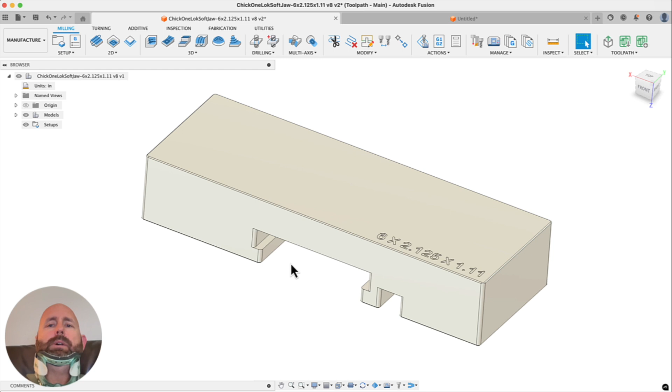Here's the part. So it's got kind of a tight undercut. We're going to use a Harvey Keyseat cutter to get in there. Other than that, it's a real simple part, but this poses some problems. I broke a tool just trying to kind of plow in there - to be honest, I just made a mistake and forgot. These tools are expensive and don't like to just go plowing into corners.

So I did a 2D adaptive, that's the right way to do that. I'll show you, the problem is Fusion has kind of a known issue they've been struggling with for years: when you're using a Keyseat cutter with an adaptive toolpath, often it'll retract while it's still under the cut. So I'll show you how I deal with that. If nothing else, the video hopefully will be worth it for how to handle that.

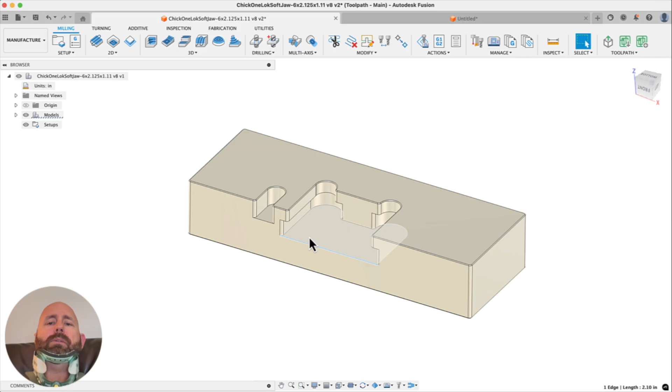And then I'm also going to show you how to under chamfer this. I do have a 90-degree side chamfer mill, but we're just going to use one of my thread mills for this. I'll show you how I do that. And I think that's really the geeky part of this, but then you'll get to see the kind of walkthrough of Toolpath. So with that, let's get started.

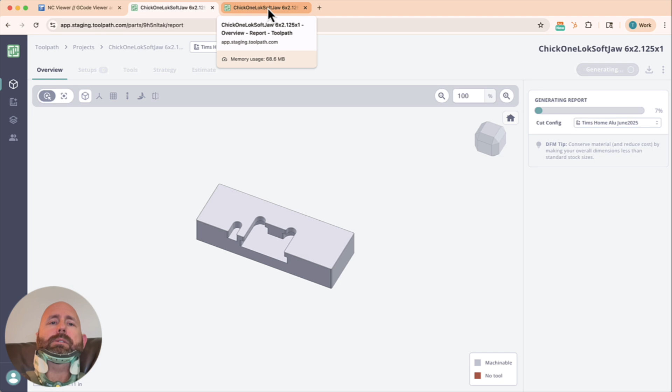So first thing we can do is we have the Toolpath plugin. We could just hit send and send that sucker straight to Toolpath. Now what this does is it's going to define your setups, right? So based on your preferences, your cut config and your stock preferences and stuff, it'll define your setups. I sent one a few minutes ago, so if we go take a look at that, there's one already being worked on here. Actually, I'm too impatient - I think that is the same as this one, maybe not. So anyways, this is going to define the stock based on what's in my preferences.

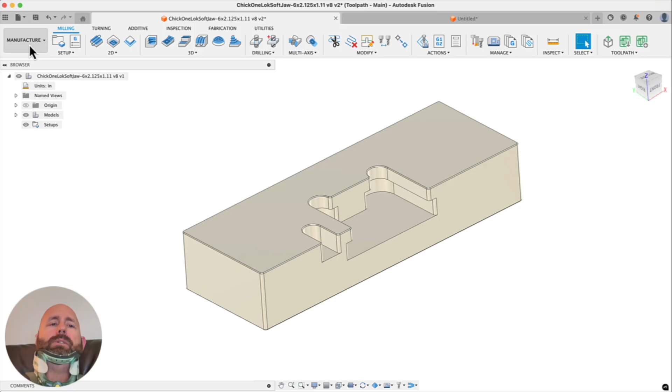In this specific case, I already have the stock I know I want to use, and I kind of want to micromanage it a little bit - tell it exactly where the work coordinate is, exactly what the stock is. So let's just go to the Manufacture tab, go to the setups, and the first thing I'm going to do is dock that over there. I like to set up my work coordinate. If you guys didn't know about this, if you click the little white dot, you can just kind of move your work coordinate system around. You can also click the head of your arrows to flip them, or you can click them and reorient them to different surfaces or line segments or whatnot.

Anyways, we'll move that sucker down there. We're going to make this the stock box point. So this is - I like my work coordinate system to be down there, against the parallel surface, against the Y fixed side of the jaw, and against my stop. So on the stock, I know exactly what size the stock is, so I'm just going to go define the stock size: 6.25 by 2.25, almost forgot it there, and then by 1.25. And then I don't want to do any rounding because I know exactly what the stock size is, but then I do want to - there's a couple ways. I can either offset it in the negative or offset it in the positive.

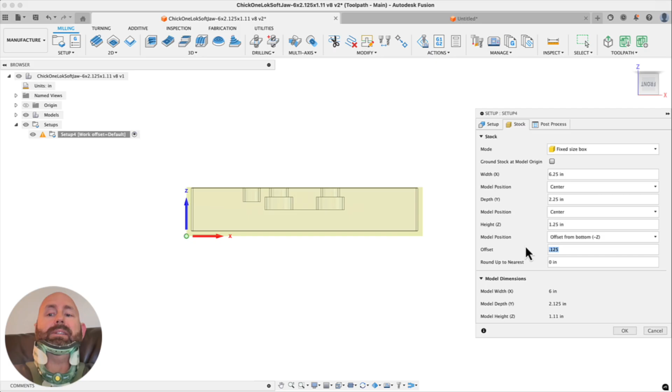One perspective would be I only want to knock off 10 thousandths of an inch for a finish pass on top. The other is maybe I want to offset it negative because I'm holding onto it with these Mitee-Bite Talon grippers, and I know I need at least 125 thou to hold. Actually, I only need about 90 thou to hold onto, but I usually do about 125. So I just remember 125 minus the 90 I need leaves me 35 thou. As long as I don't go below the part by 35 thou, I'll be good.

So on the post processor setup, we're going to do 10001. We'll call this first op.

On the work coordinate system, for any new Fusion users, 0 and 1 is equal to G54, 2 is 55, 3 is 56. I'm going to use 54 and 55 on this. I never use 0, because if 0 and 1 equal 54, I leave 0 for when I haven't made a decision on what work coordinate I want to use. So if you ever open one of my files and it says 1, 2, 3, 4, or whatever, I made that decision. The only time I'd leave it at 0 is when I open a program and see 0.

It's like, okay, maybe I want to run out to the machine and make sure I'm not using something. In this case, I'll set that at 1, so my output will be G54.

I always like to come back and make sure my model's not selected, right? Make sure my model's selected and we're good. Just a troubleshooting tip - if you ever have weird stuff, especially with 3D toolpaths, the first thing you should do is go to the setup and make sure you have the proper body selected.

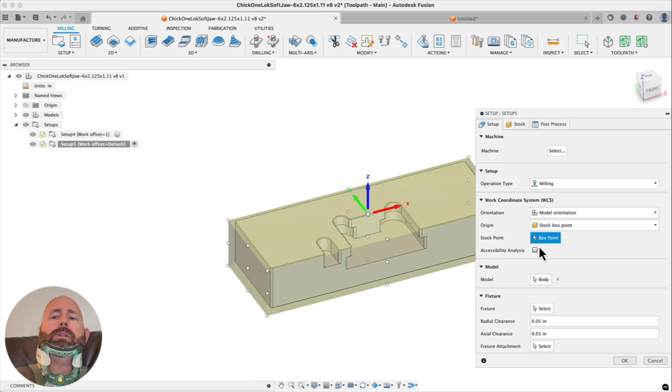Okay, and then the second setup's easy, we just do another one. We're going to do a model box point on this one. I want it to be this orientation, so I'll flip the Z, flip the X, and put this guy right down there on the model box point. Again, this will be against my stop on the X. This will be my stop and my hard jaw in the Y, and then I'll have it sit on the parallel surfaces or surface.

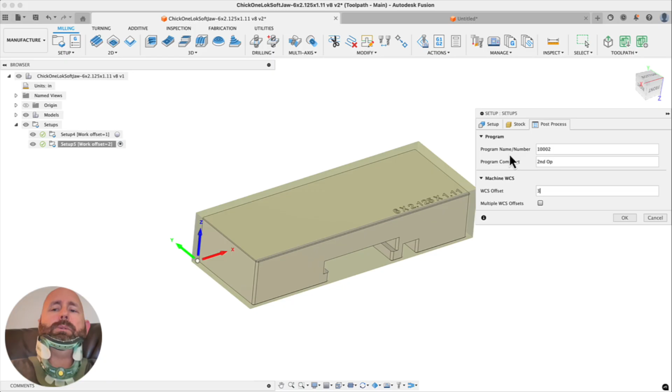Stock, we're going to do from preceding setup with continue rest machining. Here we're going to do 10002, we'll call this second op. Then I'm going to output this - we did 54 on the first one, so we'll do 55 on the second one. We'll hit OK, so my setup's ready.

If I didn't talk through that, it would have been a lot quicker. But the nice thing is now I've basically micromanaged it. I already have the stock, so I have to use this stock. Toolpaths should probably come up with something pretty similar because I have my preferences set up like that, but this will be exactly what I want. Then when I get it back from Toolpath, I don't have to worry about resetting any of that stuff.

Let's just save this thing real quick - I'll say stock ready for Toolpath. Okay, and then we'll send this over to Toolpath. Here you'll see the difference from that last one I showed - it's asking me, hey, do you want to send it over with these two setups? I'm going to say yes.

So now it's coming over. My guess is it's probably going to take about 2 minutes, so as it loads up I'll talk through what's happening, and maybe we'll run over and take a look at the first one I sent over without the attached setups.

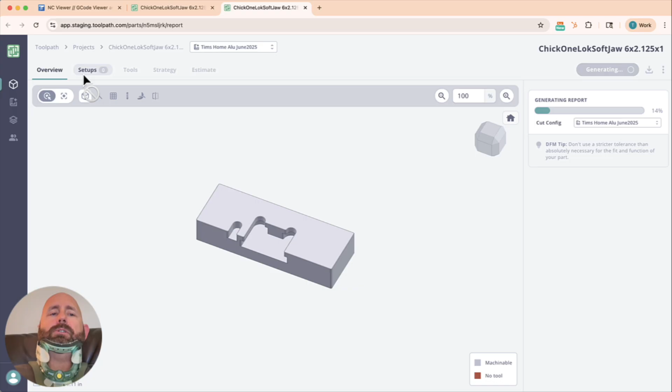So this is popping over, everything looks good so far. It'll take a minute or so to look at the setups. Let's go back over here - you can see the overview, setups, tools, strategy, and estimate tabs are all ready to look at. It even says copy and ready to send back to Fusion.

So we can take a look at the stock, right? I said it's probably going to be pretty close to what I wanted. You can see the stock size is 6 inches and basically a 1/16, and the Y and Z are exactly what I would have already set up.

It's probably offset a little less on this side than what I set up before. The X is a little shorter, but I know the material I had, which is why I went through the extra step to define the stock. So let's take a look at the part real quick.

You can see we have a 99% machinability score, meaning 99% of the surface area is machinable, and these numbers here show what's not machinable with my cut config. That's real tools in my shop, set up the way I want. We can go over that in another video, but I have a library and a cut config with different tools set up. The cool thing is I have recommendation tool catalogs that say, hey, if I don't have the tool, go take a look at this.

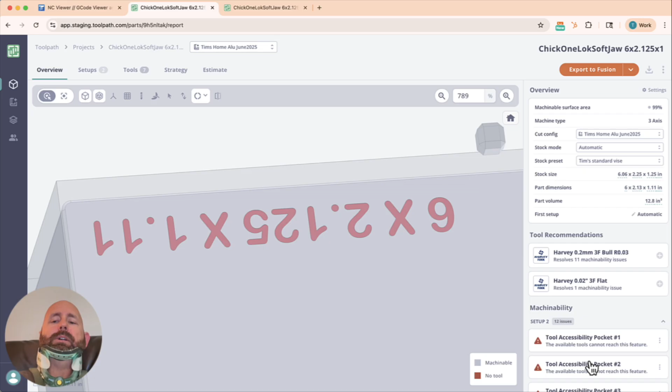So with that, I have a couple tools recommended. If I click here, you can see, if I flip over and zoom back in, all the tool accessibilities are these tiny little pockets for my engraving. I do like to engrave this, but I don't want to actually make pockets. I'll show you how I do that in Fusion.

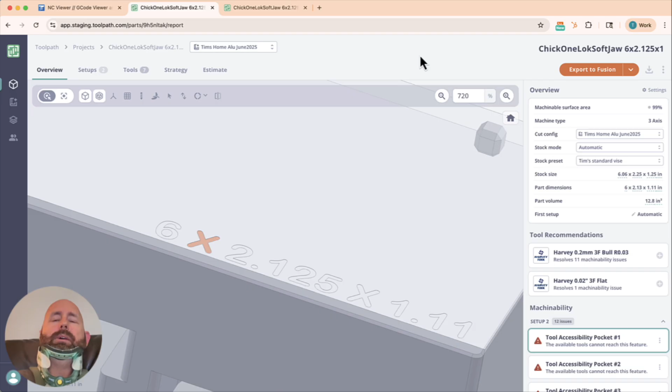Hopefully I remember. But if I wanted to machine those, I would just hit plus and plus and regenerate that, and that would give me these machined pockets and tell me basically what tools I have to go buy. So the setup's pretty basic. It picked the same first setup that I picked, and the same second setup that I picked.

Cool little pro tip I learned recently: if you're on one of these setups, instead of going down through here, I just want to know what's machined on that first setup. If you hit setup 1, all of that is machined in the first setup, and that's not the same thing. If you click on the setup here, that's what's getting machined on the second setup.

So that's nice, and you can see here's all the pockets that aren't getting machined because we didn't add those Harvey tools. So in the tools, here's my tool list. Tool 1 is my favorite face mill. Tool 2 is kind of my go-to rougher finisher. There's my keyseat cutter, tool 7. Tool 36 is my 1/4 inch 3 flute.

It's got a 60 thou tip, corner radius. I have another flat end mill. This guy's my favorite rougher, and we've got a couple different tools here.

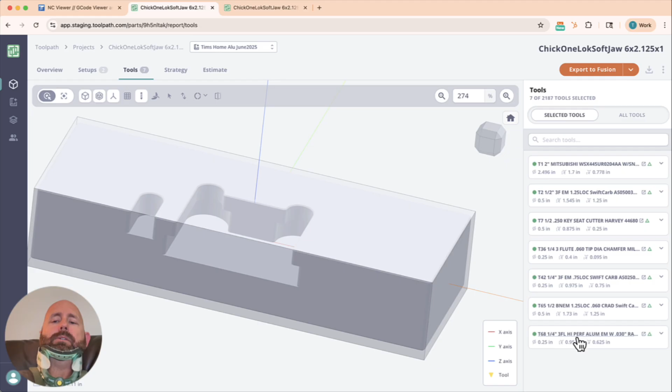So strategy—this is where if you want to see, hey, what is this super swift carbide rougher doing? Well, that's what it's going to do. And then here's what your finisher is going to do, and so on.

The only difference here is that this is with my exact setup. You can see how we have a little bit extra material on the sides, a little more offset on the bottom. Same tool recommended, right? So let's hit copy the part key, and then we'll go back over to Fusion and hit OK.

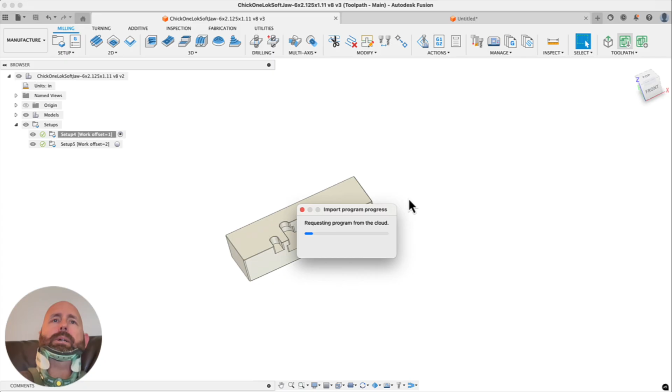Now we have a decision to make: do I want to import into a new document, or do I want to import it into the current document? I'm going to just dump it into here—I already made the setups, just add the toolpaths to that. So we'll do import into current document, and that'll take a second to come in and add the toolpaths to my setups and then start calculating.

We're getting better and better on the toolpath automation. I'm pretty happy with it. I don't think I do any parts now that I don't put through Toolpath first as an accelerator to get me started with all my roughing toolpaths and finishing toolpaths and all that kind of stuff.

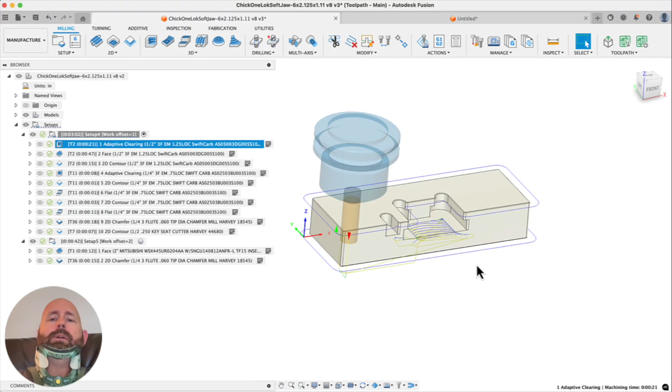So if I expand these, you can see we have a nice roughing toolpath here. I'll do a face with that tool. We'll talk about making these changes in a second, but so far everything looks pretty good to me. I see some things I want to change.

Our goal, there will be a day when we're knocking this stuff out of the park and you'll just do a quick simulation and run it. But our goal is just to be a big accelerator for now.

On this side, what I see is that it basically did the face and did the chamfer. We're gonna add engraving there. On the first side, the main thing I saw, there's some micromanaging I'll do along the way. For now, Toolpath is only doing essentially 2D contours for keyseat cutters and slot mills, slitting saw type tools. It does a really good job of breaking it up to make sure you're doing the right depth. Some people kind of struggle with that.

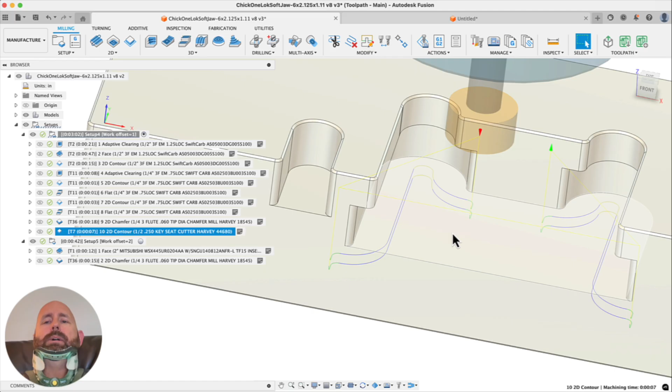I know that tool won't handle just plowing in there and plowing out. So we're going to add a 2D adaptive so we don't overload the tool into those corners. Then we're going to add an under chamfer here, chamfer here, and chamfer there with a thread mill, so it won't be a 45-degree chamfer, it'll be a 60-degree chamfer, but I'll show you how I do that. Maybe I'll even show you how to store it as a template so it's really easy to use later. So with that, let's get started.

There's really nothing wrong with starting off with this 3D adaptive. There's nothing really wrong with that, but to be honest, I want to do the facing ahead. Sometimes it's easier to drag down. I want to just start off by facing with my favorite face mill.

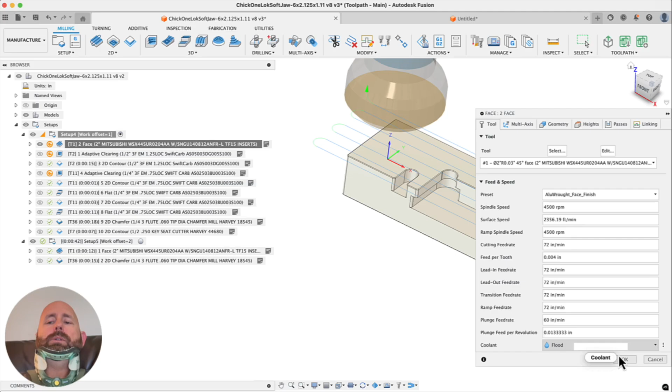I'm just going to change this to this face mill with my finish feed rates. I'll hit OK, that's a quick change. Let's just regenerate this. Now this is using tool 1, which is a face mill, so that's nice, it doesn't go very far below the part. If it did, I would change it because I already told you I can't go below that. We're holding on to 125 thou, so I can't, and I need 90 to really hold on to. So I can't go past the bottom by more than 35.

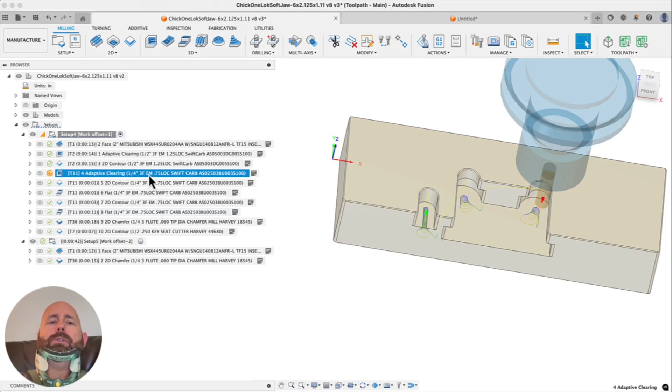Here's the finish. So we have tool 2 rough and finish, which is great. Tool 11 does that, which seems fine. We'll regenerate that. Tool 11 comes in here to do a wall finish, and then it does a floor finish. Knowing that the tool's wide enough to do both and just the wall finish, I'm going to delete the flat machining. The Toolpath will make that better here in the not too distant future. But for now, we do a flat and a wall and pretty much everything.

On the bottom height, we gave it 1/10, basically stepped it up 1/10 so we don't drag on the bottom. And then I just want to make sure we didn't do the same thing on stock to leave, so I'll turn that off. So what I did is I changed the bottom height to reflect this bottom, and then I got rid of the stock to leave there too. So deleting the flat was just saving a little bit of time.

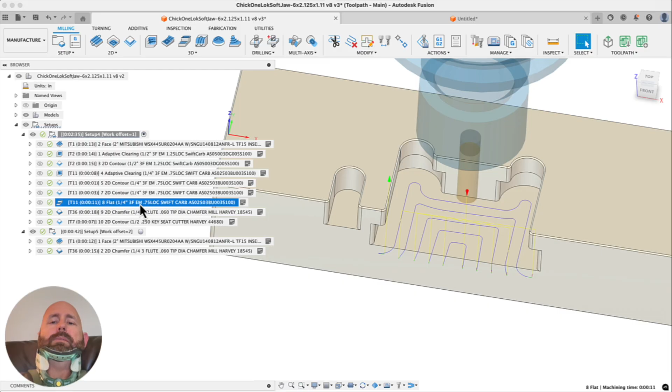This is an example where I'm gonna let it be. I'm gonna let it do the walls and then let it finish the floor, so that works out really good. And then I'll let it chamfer, and then I'm gonna fix this. And then we'll add those under chamfers in a second.

The first thing I want to do is right click and create a derived operation because I want to reuse some selections. And then I'm going to do 2D adaptive clearing. Now let's just hit OK and see what we get. Okay, so that's actually not terrible. We could actually run that, and then I bet right here we would have a problem. But we're also cutting a ton of air that we don't want to cut.

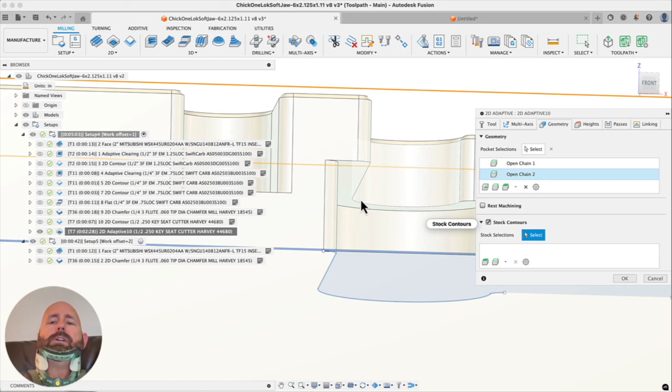Let's edit this, go to geometry, and that blue kind of shaded area, it thinks is all the material it needs to cut, because this is kind of just a dumb 2D toolpath. So we'll go to stock contours and say, hey, actually, let's deselect that. This is actually the only area you have material to cut.

I want to break up each side separately. Now I could delete this geometry here, but I don't need to. So what happens if we hit OK now? Okay, so that does a really good job, except I see some problems.

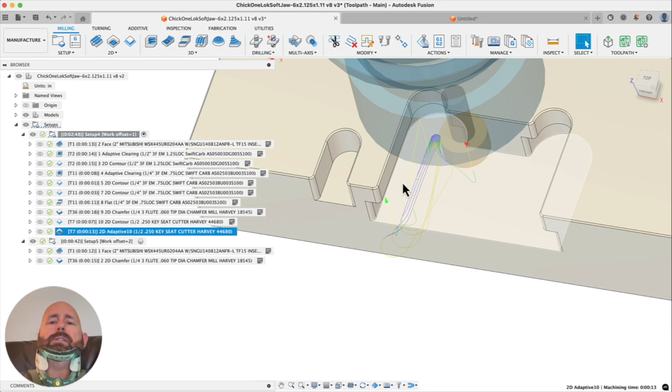You can see right here that's gonna lift up. If I go to simulate, if I click right there, that is going to be a problem right there. It's going to gouge my part.

And that's the geek tip side of this video, is I'll show you how I deal with that. There's a couple problems here actually. If we look, it's lifting up here and it's lifting up here to get out. So I want to force it to stay down a little bit longer.

So let's go to edit, linking. I only really want it to come out once. First thing I'm going to do is get rid of the vertical lead in radius, lead in, lead out radius, make that 0. That way it doesn't ramp out.

And then I'm just going to change some stuff here. My no engagement feed rate, my machine goes up to 800. This is just the repositioning, so I like to make that. To be honest, I would right click here and save as user default, that way I don't have to change it every time.

Lift height, I don't need no lift height. I want to just stay down. Stay down levels, my default for this is 70. So I'm going to save that as my user default. 70 just seems like a good kind of balance for me.

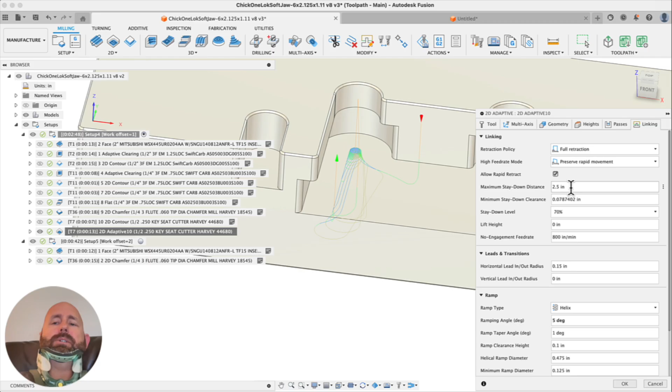And then my maximum stay down distance, like how far do I want it to stay down for retracts and repositions? I kind of save this part to part. This thing's 6 inches wide, and I kind of want to force it to stay down as much as possible. So I'm going to make it 8 inches.

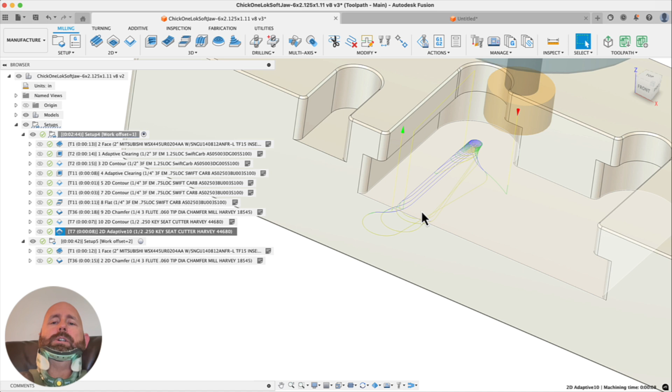So now what kind of toolpath do we get there? Okay, so now we do get a reposition over here, which I don't like at all, to be honest. Another part I did, it just went in, came out. I'm trying to think how I could force that to do that for me.

Oh, let's just play with the heights, make sure we have that right. So let's do from selection. We're going to define the top by this here, but we're going to go down -5 thou. And then the bottoms of selected contours, we're going to go up 5 thou because I want to save those 5 thou for the finish passes.

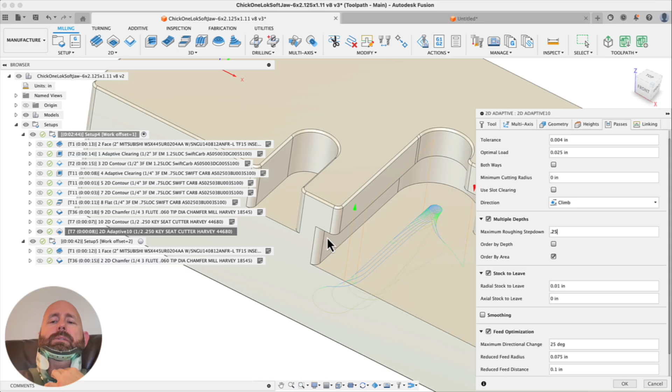And then the next thing I want to do is turn off my stock to leave. Oh no, I'm sorry, I want to make like a 10 thou stock to leave on the radial, 0 on the axial. And then multiple depths, I'm going to say the maximum I can go down is 250. Fusion will do a pretty good job knowing that it's got to be 360 or whatever this is, and it'll do one full depth and then the next one lower.

Yeah, okay, so there you can see we have one entrance here and one exit there. But that exit, if I go to simulate, is going to be no good, right? It's coming up through the part. So we have to find a way to force this to exit over here and then come up. Stick with me for a minute and I'll show you how to do that.

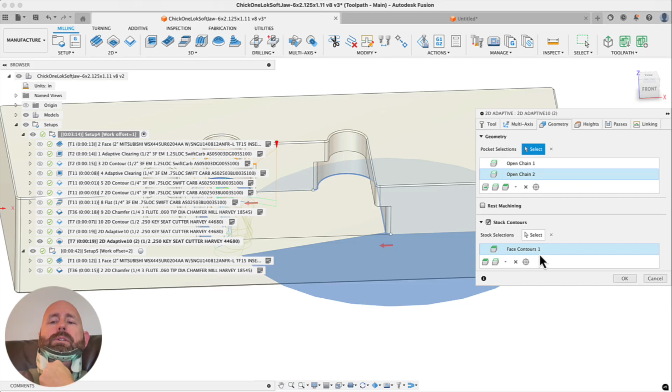It's a total, to be honest, it's somewhat of a hacky workaround, but I think it's a pretty acceptable workaround for the 2 or 3 times I have to do it a year. So what I just did is I right clicked and duplicated that toolpath because I want to reuse everything I just did. The only thing I need to change is what defines the stock. And to be honest, maybe I could have done that with one toolpath, but so the retract, we still got one retract and it's over here.

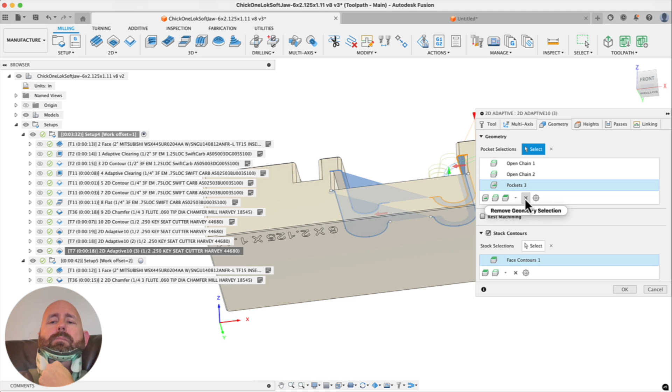But let's just duplicate this one more time and then see what happens if we combine it into one. I don't know why I was predicting we'd get something kind of wonky because I saw, oh yeah, I did the wrong thing here. So I want to pick that and pick that. And the blue, whenever I see blue like that, I get nervous that something wonky is going to happen. It's probably fine, to be honest, but I don't like it.

So I'm going to delete that. We're going to go in and manually edit code to get our lead outs where we want. And I just want to make this as simple as possible to edit.

So I'll show you how to do that after I show you how to do these under chamfers and whatnot. This is my Toolpath account. In my personal account, I have templates saved, so hopefully I'll remember to show you how to save this template. But let me show you some pre-work I did ahead of time.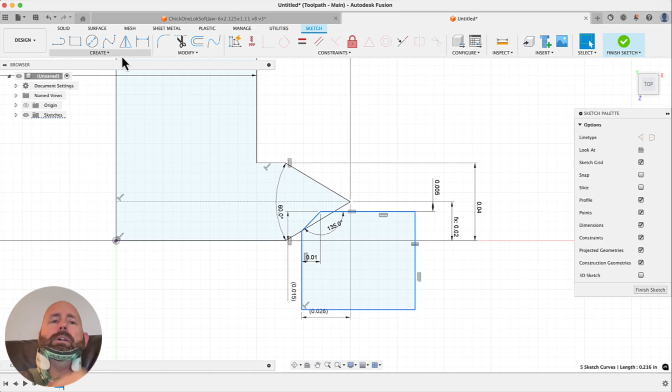Basically what we're going to do is come in here and use this chamfer mill to chamfer both the bottom and under chamfer. So let's mirror this thing real quick. We're basically going to do that. We're going to chamfer under that edge and we'll just use it to chamfer this edge too, because then I can kind of get under this and down over here.

And my side mill, honestly, I can't find my side chamfer tool. I'm in the process of reorganizing all my tools out in the shop, so I think I just misplaced it for a short time. But so we're going to teach you how I would do this and this.

A couple things we want to pay attention to: the width of my chamfer mill is 40 thou. We have a 60-degree angle like every chamfer mill I have. And then this is, let's say we have a 10 thou chamfer. We actually want to, we're not going to get the 45, right?

So we want to have a 10 thou chamfer in the Z. So I just made that coincident. And I'm willing to kind of go over, in this case it'll be over in the Y and X, right? So we have 20 thou, we have 5 thou. I just kind of modeled this out, 5 thou. We could trig this out pretty easy, I just wanted a visual. So we have 5 thou there.

So really what we need is this number here, 26 thousandths. That's basically from here to here. And then we also want this distance from here to here, so that's 15 thou. We're going to offset it in the Z 15 thou, and then we're going to offset it radially 26 thou.

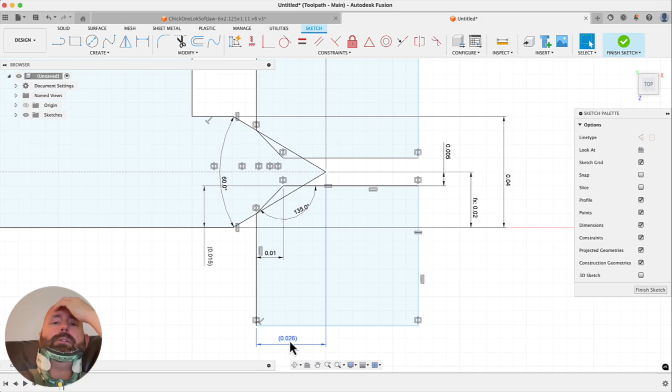Okay, so let's go back. 15 in the Z, 26 in the radial. Okay, so how do we do that?

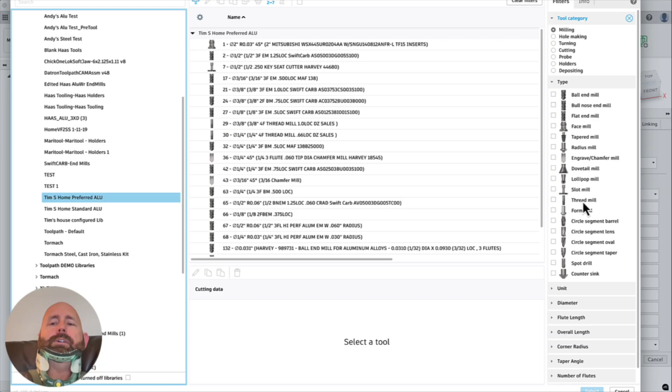I'm going to go to 2D contour. I'm going to try to remember where I have this chamfer mill. Let's see if I put it in here. I feel like my reading skills get way worse when I know I'm being recorded. Chamfer mill, chamfer mill. No, I was looking for chamfer mill. What I meant was Threadmill, right? So maybe if I actually look for Threadmill, it'll be easier.

So here we go. Here's my Threadmill that I want to use. What I'll do here is I'll just pick this edge. I'll pick this edge. Oh, you know what, this isn't going to let me do this. Yeah, so I forgot, my crappy hack is in my tool library, and this is all hack stuff. Fusion should let you do this.

I created a form mill that mirrored. I'm just trying to remember where I put it. I created a form mill where... here we go. No, that's not it. I created a form mill that matched my thread mill, because Fusion won't let you use a thread mill to side chamfer with, which is complete garbage. Fusion can do better.

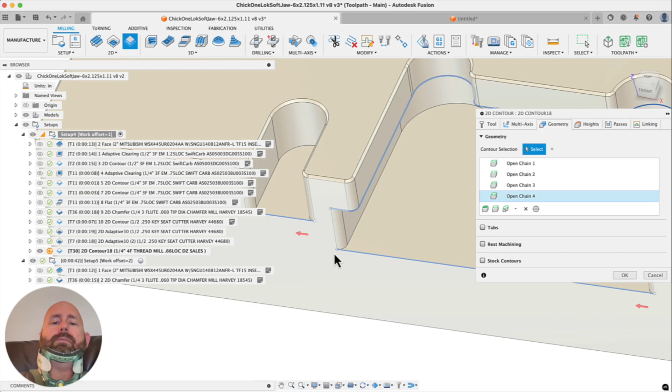I've requested it, but so now when we come here, we can do this, we can do this, we can do this, right? Maybe we want to break them up separately because we're going to have to shorten our leads so we don't gouge these parts.

Okay, so now we're going to go to where I adjust how much we want to step over and down, right? So we're going to go stock to leave. And remember, we're going to go radially 26 thou, axial offset of 15. Oh, we lost that. That sucks.

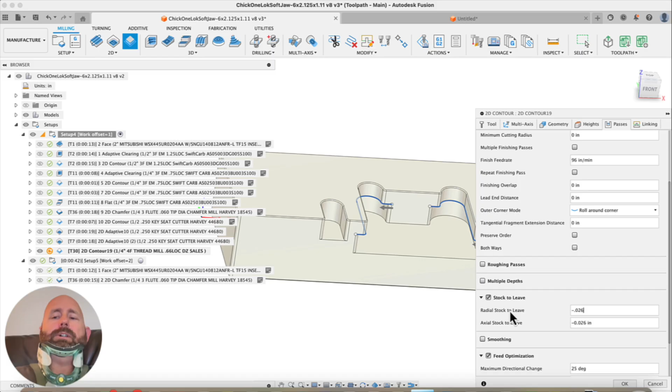I apparently need to rethink how I'm working. We need to do the undersides first, right? So we'll do the undersides first, and then we'll do those other ones. So we'll do passes, and we'll do stock to leave, radial negative 26 thou, and then axial negative 15. Let's see what that gets us.

So the first thing I care about is, am I hitting the chamfer the way I want to hit my chamfer? Don't worry about that big gouge there.

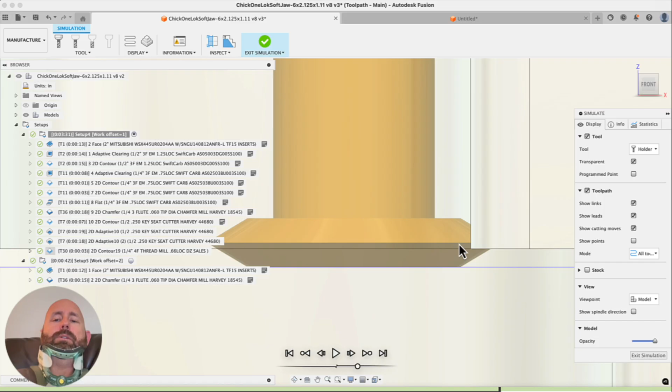Let's turn off stock. And I went the wrong direction, right? I went down 15, so what I really needed to do was go down 20 and then another 5. Half the tool is 20 and then another 5. So I should have been 25 thou below that edge that I picked.

So let's go back and do that. Negative 25 thou. Did I do that right? I think I did that right.

The key here is to save this as your default, so you only have to think it through and verify it once, and then you just reuse it over and over.

Yeah, this is what I was trying to do right here, right? So I got this 5 thou below that, and then I have a nice, from here to here is 10 thousandths of an inch. So that works out great.

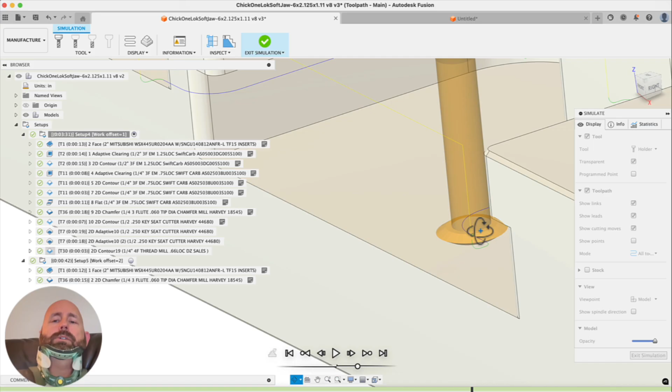Now the problem is that I'm gouging the crap out of this part here. So how do I know how much to look at this? I want to avoid this thing by—if you didn't know this trick, if you're in simulation, you can click on things like this, and then left mouse click and hold and just kind of drag it through the toolpath. So what I really want to do is get this thing real close to that wall right there.

I'm going to get it in like a contrast area. Right there is about where it touches, right? If I drag it out just a little bit from there, I have clearance. So how do I know how much I just moved it?

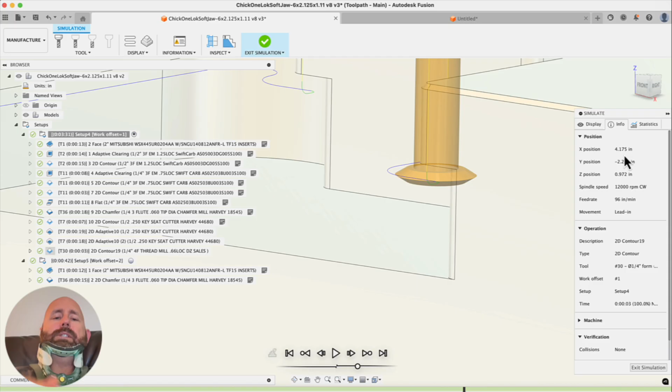Well, if you go to info, check this out. This is 4 inches 80 thou. And if you go back to this point right here, that's the beginning of the toolpath, right? So 4 inches 80 thou, and this is 4 inches 175. So if I go to my calculator, 4.175 take away 4.08, that's a 95 thou difference. So if I just move the toolpath this way, 95 thou in the X, I'll avoid gouging this here.

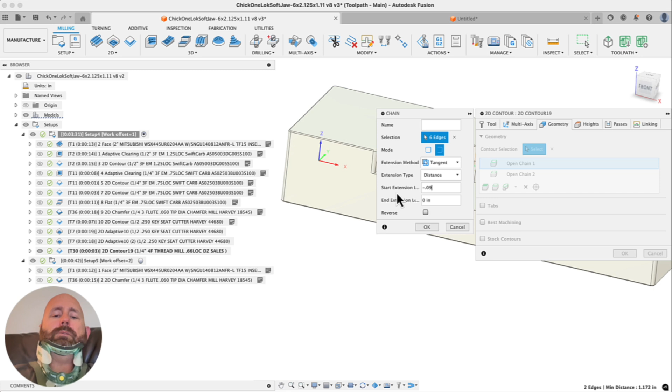And these are all the same radius, so that should be good for everything. So what happens if I go here, go to geometry, double click on this, and go negative 0.095, does it on both. So I just did a negative tangential extension of 95 thou, negative 95 thou.

Okay, so let's verify that. So if we go simulate, now when I come in here—oh, I should also share something else. But anyways, that is a really nice gouge-free until it has the lead in, right? So if I go to this point right there, I have a really small window of not gouging, and then I do the lead.

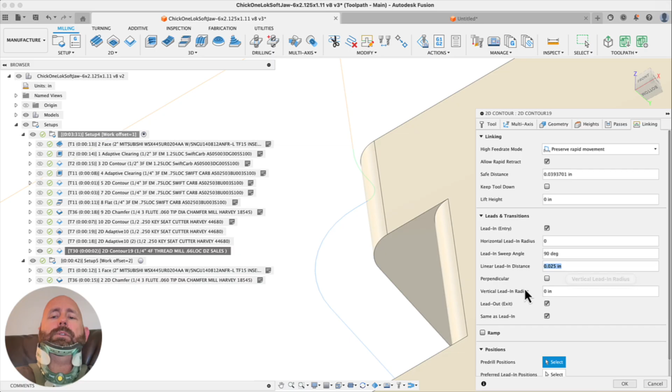So I'm jumping around a lot, but if I go to edit and then linking, now what I want to do is turn that lead in radius to 0, leave the sweep angle to 90. Now we can leave this or make it even longer, but then we turn on perpendicular. And what that does is give us this very straight lead in, so that we don't gouge on the lead in or lead off.

So my intention of these Geek Tips videos is to show you what we're doing at Toolpath, but also that Toolpath for a while isn't going to be your 100% solution, even for some of these really simple parts, if you want your parts to be awesome. My hope is that Toolpath frees you up from picking and clicking all your other stuff so you can do, just make your parts super rad.

So like this, we have a real tight chamfer really close to that edge. So that's how you save that.

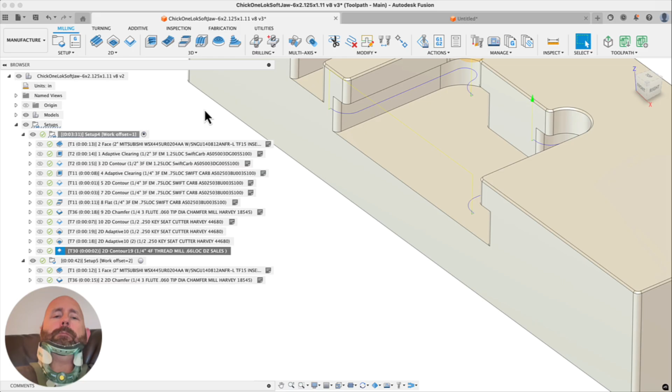Now what I'm going to do is come in here. I'm going to say store as template. I'll say tool 30 chamfer threadmill. Okay, watch this, I'll delete this. And then now I'll come up to the setup and say create from template. Create from template, tool 30 under chamfer threadmill. And look how easy this is going to be. We edit this, go to geometry.

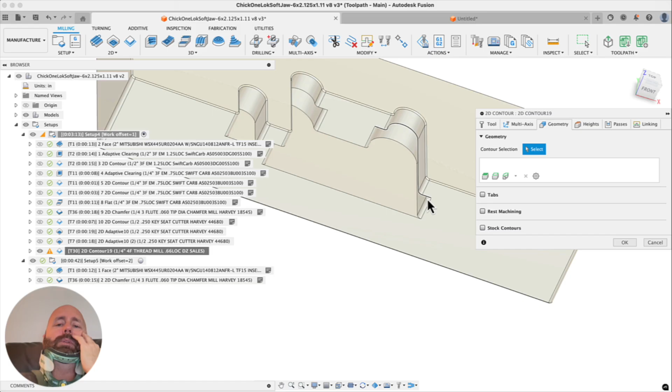Fusion has a problem, it should not be thinking there's open chains. It should just clear those out, but you can clear them out yourself. Click on this, life is good, and then you have that. I'll save you the simulation, but trust me that's done and awesome.

So now if I duplicate this, edit this, look at the stock to leave. We went down 20 to get to the center and then another 5, right? Now we're going to be using this for here, might as well do it there too, but we're really looking to get under this. So now we need to move it up 5 to put it on center, and then up another 5 above that.

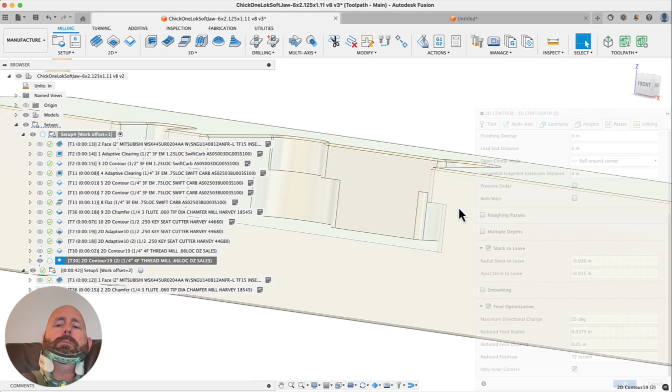So now if we go here, if we do negative 15, that's kind of what I was showing you earlier. That should be great. So simulate - oh, I didn't do that extension, right? But if you look here, this is where we want it to be.

So now that you know the chamfer mill is where you want it, we have to shorten the tangential extensions and change - we shouldn't have to change the leads, just change these, right? So we'll do negative 95, negative 95. And just for thoroughness, I can simulate that.

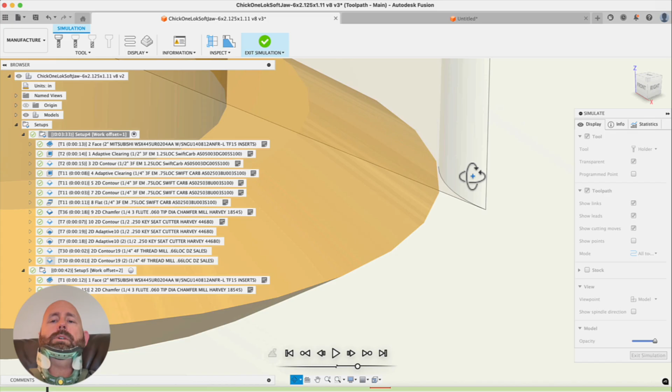Now, if these fillets were different size, we'd have to adjust - we have a super nice clearance there, right? If these fillets were different size than what we did before, we would have to change that a little bit. But I designed these, so I used the same fillets, and we have a super nice clearance. It's a nice way to use the tool you already have.

Okay, so that's that, I'm pretty happy with this part. The problem is if we posted it right now, we would still have this gouging situation. So how are we going to get out of that?

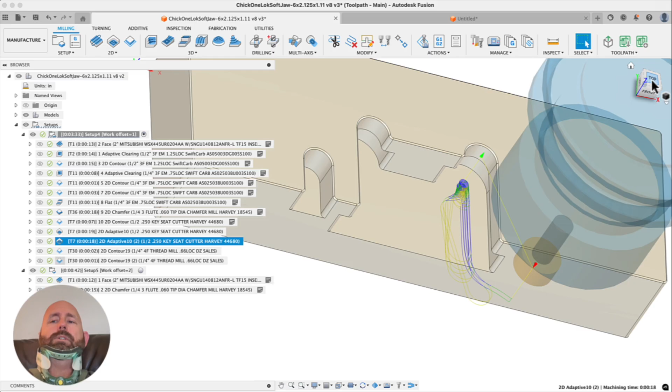The first thing, remember, is we're going to retract here under that shelf, we're going to retract there under that shelf. So that's a problem. Remember, our work coordinate system is 1/8 of an inch off of this and 1/8 of an inch off of this. Yeah, so it's actually 62 thou - 1/8 of an inch on both sides, 1/16 of an inch off this way, 1/8 of an inch off that way.

So what I'm actually going to do is come over to the design side and put a point right there first. We're going to make a sketch, and then drop in a point where our work coordinate system is going to be. We'll dimension this, which is 0.0625, and 1/8 of an inch there, right?

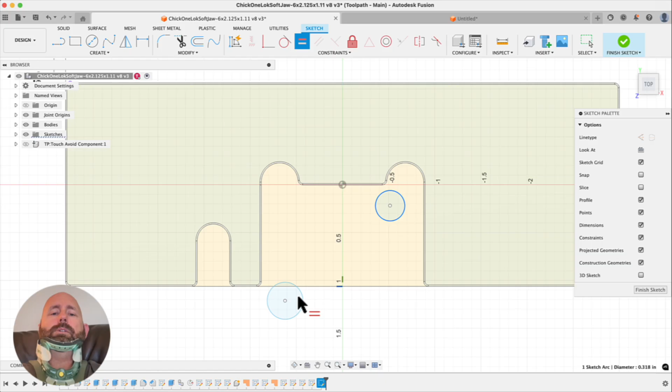Next thing is I want to pick where I want my tools to retract. They're both - not both, it's one tool - it's a 1/2 inch tool. So just, not model, I'll sketch up real quick where I want them to be.

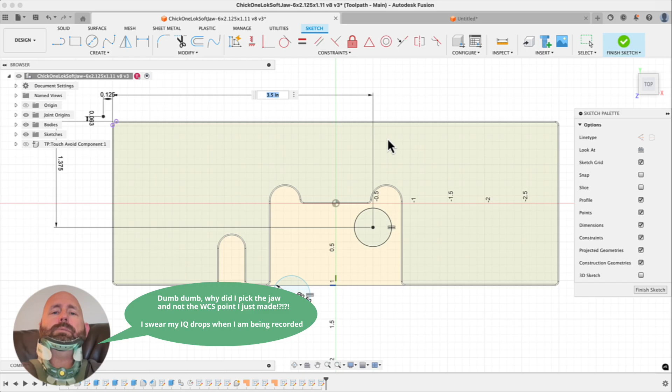Let's say I want this guy to be roughly there, and this guy to be roughly there. So let's do our Y dimension for this - that is, we'll just round up to 1.375. And then let's see what happens if we go 3.5. Seems good. What happens if we go 3.625? That's not good. So 3.5 it is.

So the intent here is that we go to a position we know we're not under this shelf, and then same thing here. We'll do X, make this 2.5, and then Y, 2.25 - do I want to flirt with this, call it 2.375? Yeah, let's trust it. This we decided was too close under there. So okay, that's that.

Now I can write those down - I'll probably screw up writing them down. So here's a little trick for you: you can come here, I'll call this retract sketch, right click there and show the dimensions. You can only do that from the browser, you can't do that down here in the timeline. So now when I go back to the manufacturing side, those dimensions are still shown.

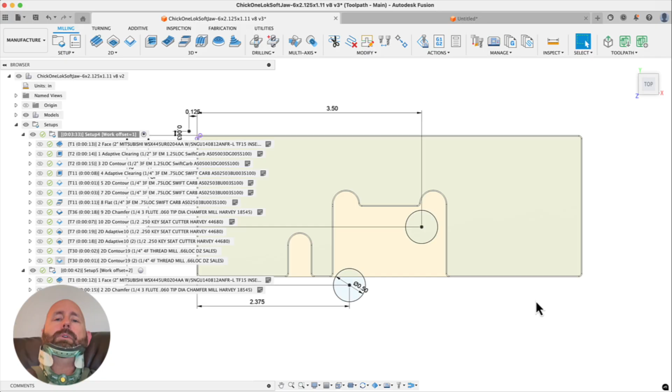Now what I want to achieve here, first of all, is make sure I'm not doing the finish pass before the roughing. So I'll drag this down below the two roughing passes, right? So I have an adaptive, and a finish. I'm happy with that.

And then what I want to do is create a stop, because we're changing the G-code here. So I want to create a stop under this and under this, with a little cheat note. I'll come up to setup and create a manual NC, and have a stop, which is an M0 in the code. Then it goes under here, and we'll duplicate that and drag this one down. I just wanted to drag this one in between these, so we have a manual, an adaptive, a stop, an adaptive, and a stop.

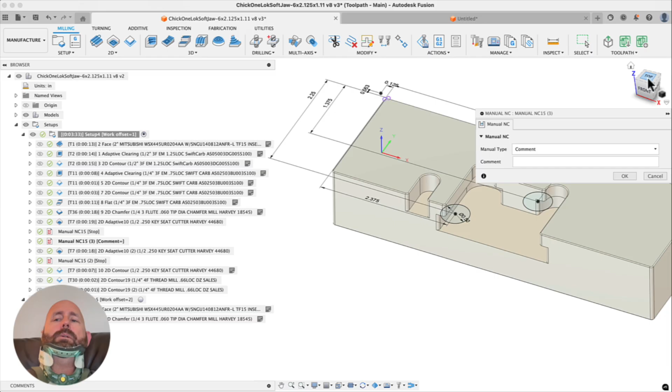I'll duplicate this and then change this one to a comment. Now let's confirm real quick that this adaptive is on the left side, and that's the one I want to retract up here. So we're going to move it from being under to not being under, and then in a straight line.

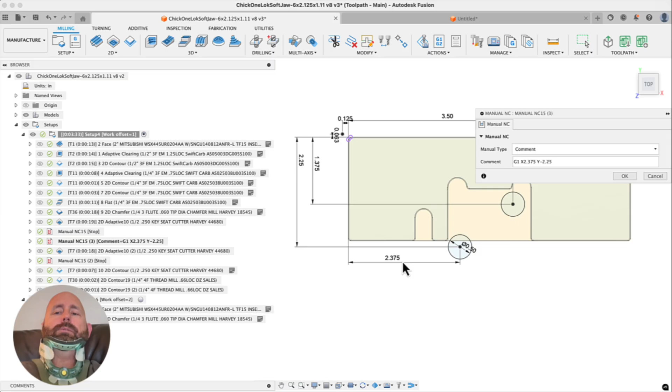And then we'll retract. So in this comment, what I'm going to do is put in the code that I want. I'm going to say G1 for a straight line, and then X 2.375, Y negative 2.25. So that's 2.25, 2.375 - those match, we're good.

And then here, I'll duplicate this, edit it, make this a comment. And then now, G1 for a straight move. X 3.5, Y negative 1.375. Hit OK. So now how do we get that to turn into code?

So I'll go to sketches. I'll just hide dimensions - so those are gone now. Let's see if this works. If I show dimensions, what happens if I hide the whole sketch? Yeah, that's what I should have done.

So back to manufacturing. So now how do I get this to the code? How do I get these changes to the code? Let's save it, I'm ready to post. I would simulate it first, to make sure everything worked good.

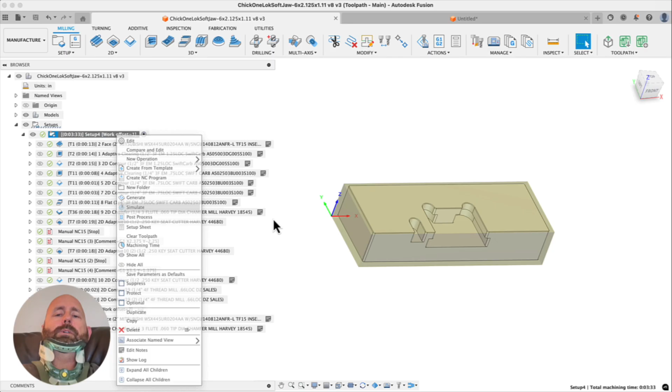There's a collision here, yep. There's a collision here, yep, we knew about those. Another one. Okay, this is just showing - did I pick? Oh, we are too close. So we need longer leads there. That's good, I'm glad I caught that.

So we need these to have longer straight leads. So go to linking - let's make this 100 thou to save, not 1 inch, but 100 thou. And I'll do the same thing here. Now you guys might be screaming into your YouTubes.

Create from template, T30 under chamfer threadmill. So if I came here, duplicate that - this kind of sucks, this is a bug right now, you have to clear that. Okay, so now I have this empty toolpath with no geometry selected.

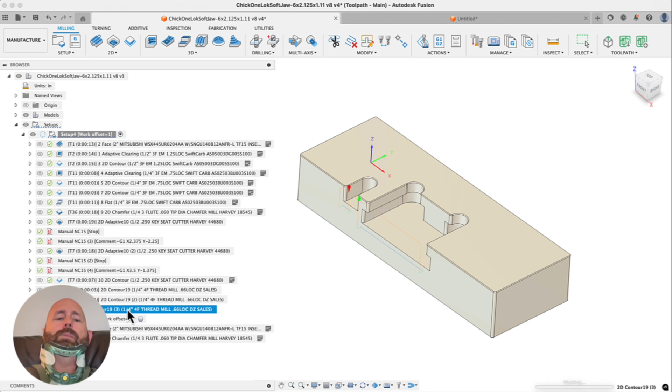Now I can do store as template, and come here and say T30 under chamfer threadmill, and that'll override it if I got the naming right. Yep, and that'll override it. So next time it has bigger lead-ins, it has everything that we changed, and we don't have to clear the geometry.

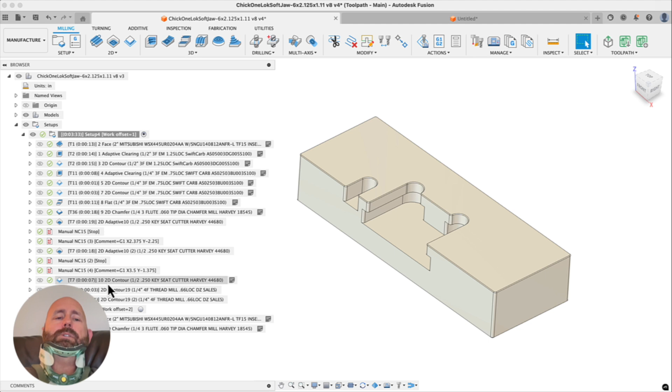Okay, so now what we want to do is post this out and make those G-code changes. Do we want to simulate? Turn stock on, let's simulate real quick, speed that up. Make sure the only collision we're getting is there with that, which we expected, and there, and nowhere else. So we have this nice under chamfer here - we have this really nice chamfer, I think that looks wonderful and everything's good.

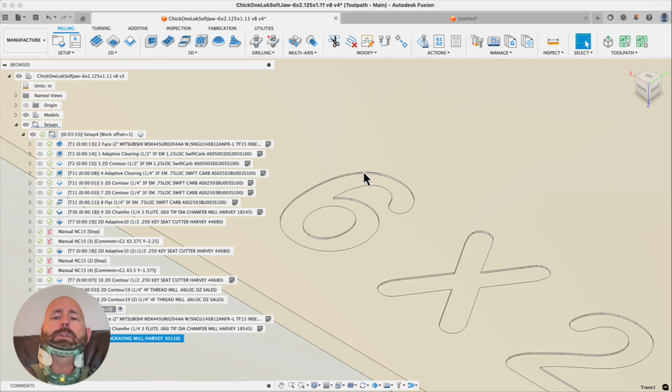Before we change and make those code edits, let's make a quick edit over here. So I have a template set up already, create from template, T8 engraving. I like to come in here and just pick my geometry so we get a good engraving in a way that I know I like to use. I don't have to remember my height setups and all that stuff. With that engraver, it just works great - it's a little Harvey engraver if you guys care.

And you can just engrave at a half thou or 3/10 or something like that and get really nice, fine, detailed engraving. In this case, I think I have it set at 2 thou, which is about as deep as I would go.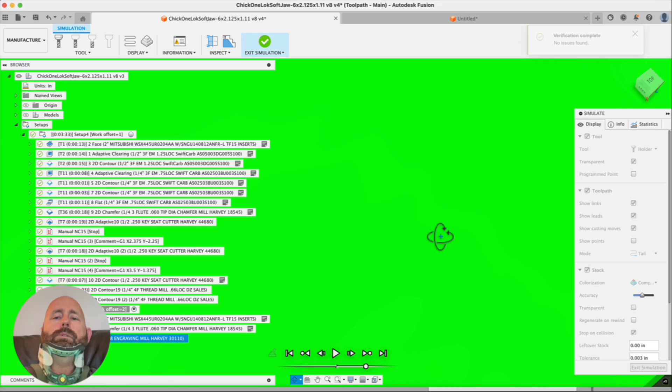So then if we do a simulation here, sometimes I'll turn the model off. Can you see? Let's do material. Yeah, it's not showing up really good because the tolerance on the accuracy isn't that good, but it turns out exceptional.

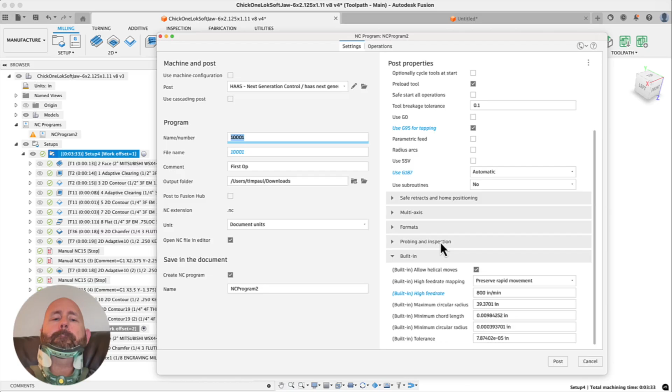Okay, so now it's time to post. Let's right click here, post, put this in my downloads folder. All this stuff is my normal stuff, and posting the first op. I have it automatically open in VS Code or whatever, and I also have the Fusion add-in that color codes everything.

So we have a couple things we can do here. We can copy the whole thing. I would probably make the edits here, but we can also go to NC Viewer, which is kind of fun. We can paste all this into NC Viewer, and the cool thing with NC Viewer is when we make changes, we can plot it.

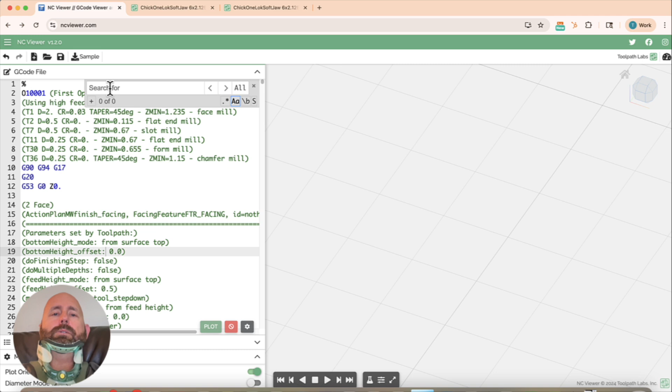So I can show you the changes. Remember, I had a manual NC to do an M0 stop. So if I go Control F to find, and search for M0, it'll find that M0 I put in there with the manual NC. M0, if you didn't know, is just a stop, so the program would stop there. And then in parentheses, I have those coordinates I put in.

So I'll copy that. And if you just walk your way up, this is the retract, and this is the last G3 that it made. So after the G3 and before the retract, I want to add that line of code right there.

Let's undo this real quick, and we'll turn on the plot, and let's see where the tool is. Okay, so the tool is, we can kind of go backwards, right? So the tool is here. If I just go line by line, the tool's here, it goes here, it goes here, and then it goes up.

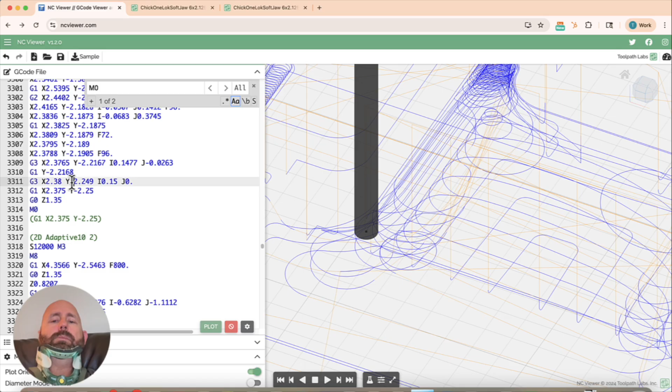And we know that it's under, right? We want to come over this way. So now if I hit enter and add that, I think I have to turn the plot on and off. So now I go here, did I mess something up? Okay, if I plot it, I'm here, I'm here, I'm here. What's happening? So 2.375, negative 2.25, that's not enough. I don't feel like that's working properly, but we know it's enough. Something's going on with this other line of code here.

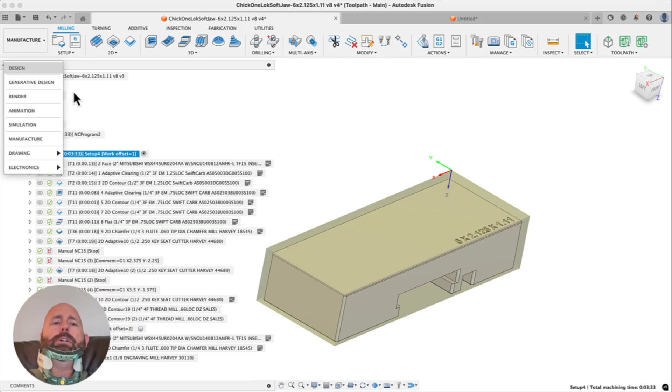Let's go check out Fusion, make sure I didn't get those numbers wrong. We'll go here, go to design, turn on the visibility of that, and look at it like this. So we're going to go negative 2 1/4, positive 2 3/8, negative 2 1/4, positive 2 3/8.

Something's wrong with the backplotting, I think. The Y basically doesn't change, X basically doesn't change. If I change this, so I did something wrong, right? Yeah, see, that's not changing now, so I have to... something's working not right. Okay, so now it's working. What happens if I change this back to 375? Yeah, you don't see that change, do you? So there's something going on with the plot that doesn't add up. I mean, it's going the wrong direction. I'm screwing something up, I apologize.

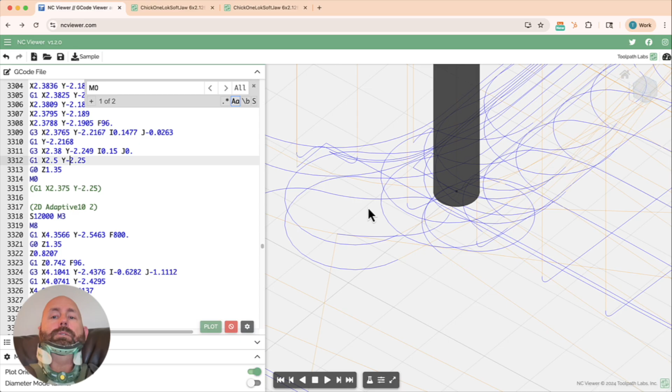I'll waste your time, but that actually kind of shows the value of NC Viewer, right? NC Viewer is a company that our friend Xander developed, and you can kind of see how it walks through there. I can even go negative 2.5, and then when we come back to here, I have to turn plot off. Yeah, so you can see it change to here, right? That's probably closer to what I want it to be to get really out of the cut. Sorry for the confusion, but let's push forward.

I would bracket this, or not bracket it, but put that in parentheses. I would copy this, search for the next one, and before I move, I would copy this. Okay, so now we get to the same point here, before it makes that Z move, I would do this, and turn the plot on and off, and then you can see how it makes that move there. Okay.

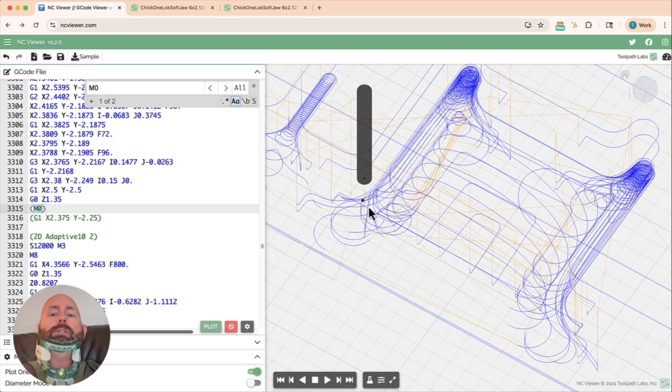So we'll search for the next M0. I wonder if clearly my brain's not working right here, but it does show the value of the back plot. So that's the first M0. We already made those changes. So this is the next M0, and we want a line after this, right? So the line after this is going to be this.

We might exaggerate that a little bit. I think I'm getting too close to these values here is what I'm thinking. Or maybe I just totally screwed up the... It actually looks fine. That's what I want, right? Is to make that move. So we'll stick with this.

I'm screwing something up on the other one, and I apologize for wasting your time. I like to put this in parentheses just so it doesn't stop my program in the middle of running it. You can see how it makes this move, kind of off the part or out from under the part before.

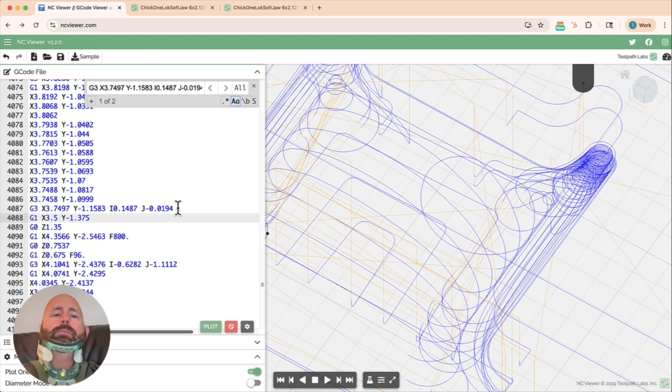It moves up. Okay, so then we're going to copy this to find the second instance because we're taking 2 Z passes, right? And we'll just copy this before we move on. That way when I find the second one here, I can just hit enter, copy that sucker there, turn the plot on and off, and then come back, make sure it takes that move right there. That's the move that we want to make before it goes up.

So I don't know what happened with that other one. That kind of bothers me. And then from here we can hit save. We can hit copy, we can move over to this if we want, replace the whole thing, however you want to get the code saved. That's how you can do it.

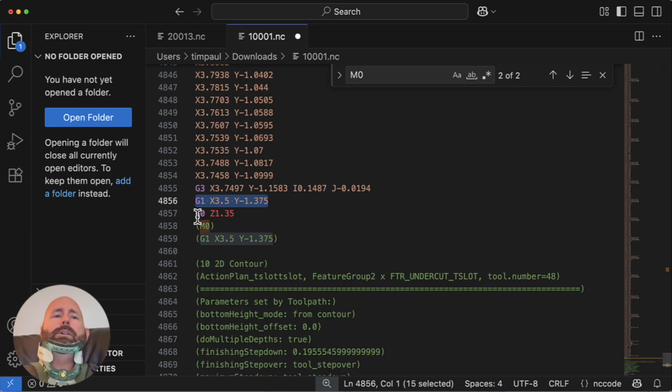You can hit Control F, search for M0. Here's our changes here, here's our changes there. So that's how I got it to work. Man, I screwed up the explanation of it, but I hope that's helpful.

I do this probably once a year, maybe twice a year, that I find that I have a Keyseat cutter kind of stuck under something. And I used to bang my head against the wall, but this is, once you get into kind of the workflow, it works pretty good.

I'm a little bothered by this. I'll have to go back and figure out what really I'm doing wrong. Oh, I just figured it out. Yeah, I didn't dimension it up to the work coordinate system. So that's my bad. Yeah, I did it to the edge of the part, not to the work coordinate system, but I did it right on this one, right?

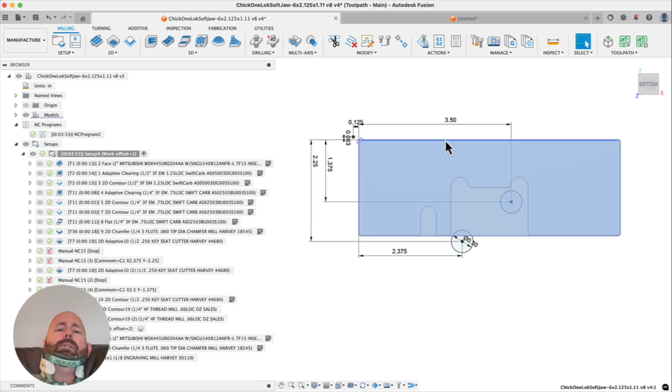That's a bummer. Actually, I'm all over the place. I did the Y wrong on this, but I did the X. I just screwed everything up, so I apologize. What I should have been doing was dimensioning it back to the work coordinate system. I guess that's what happens when my brain goes bad. My head's probably not that great anymore.

But the key here is an M0, so it's easy to search for. And then you can just put this in as a comment so you can copy and paste it if you get the right dimensions in. So with that, I'll stop taking your time. I really appreciate everybody's time.